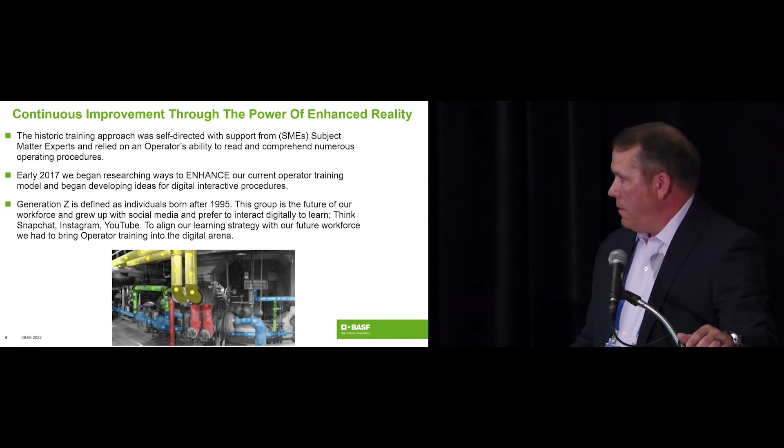Let's talk a little about some of the challenges. These aren't new challenges for the manufacturing community. These are always top priorities. EHS - what EHS enhancements do we see with bringing in digitalization? How can digitalization tie in with EHS? Equipment reliability - it's very important that our equipment runs. How do we train our employees so they're starting up equipment safely, shutting it down safely, so they're not damaging the equipment and they're not in harm's way?

Process safety compliance - this is big. How do we ensure with our training that operators have the competency? And if they don't have the competency, how are we doing training remediation? How do we remediate when they're not meeting the competency level that we need?

And that's not only on refresher training, but also on initial training. New hire onboarding - how can we lift our new hire onboarding with digitalization?

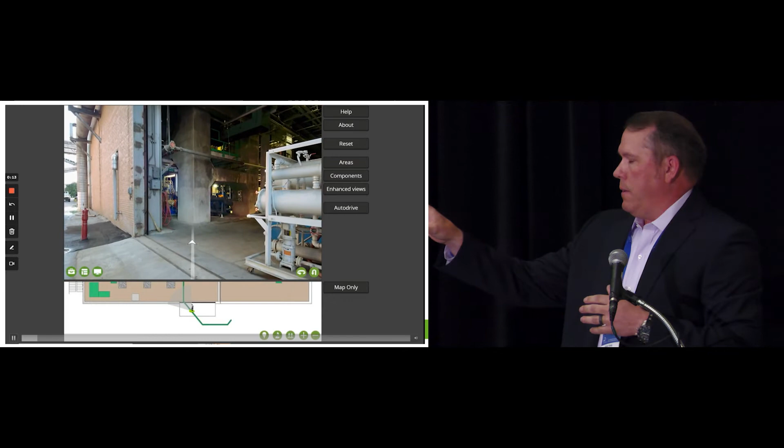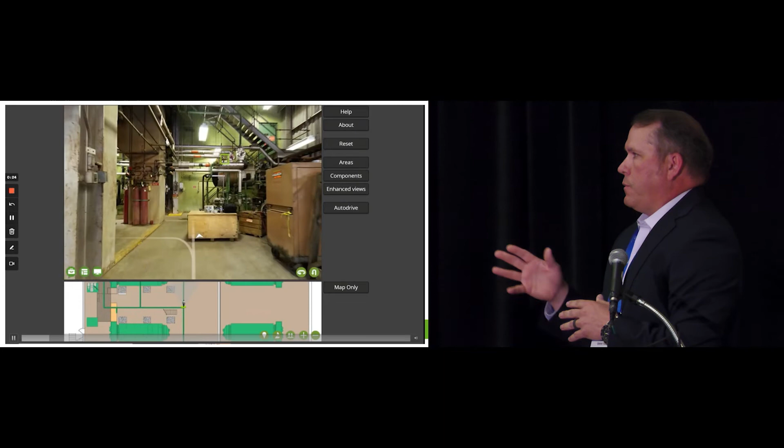So this is the digital replica. These are JPEG pictures that have been stitched together, allowing you to smoothly walk through your process. As you walk through, you can look at the different pieces of equipment—you can look up, look down, and do a 360 look around.

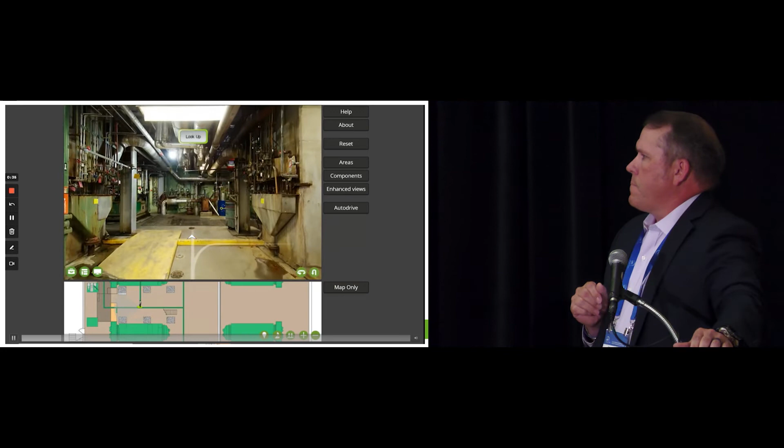Also, once we get into right here, you can see the green boxes. When you hover over a green box, it tells you exactly what it is. Then when you click on it, it gives you a blown-up view, and you can interact with the valve. This is where Vuvio is unique—you can actually interact with your equipment through the simulation.

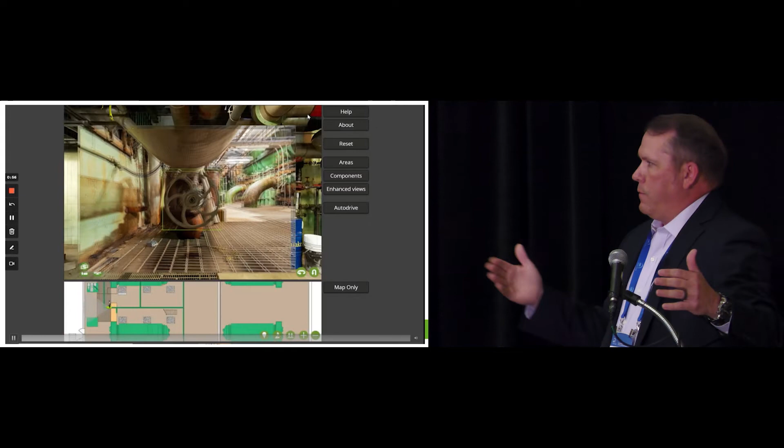A lot of the newer operators, this is what they're looking for. This is what they want.

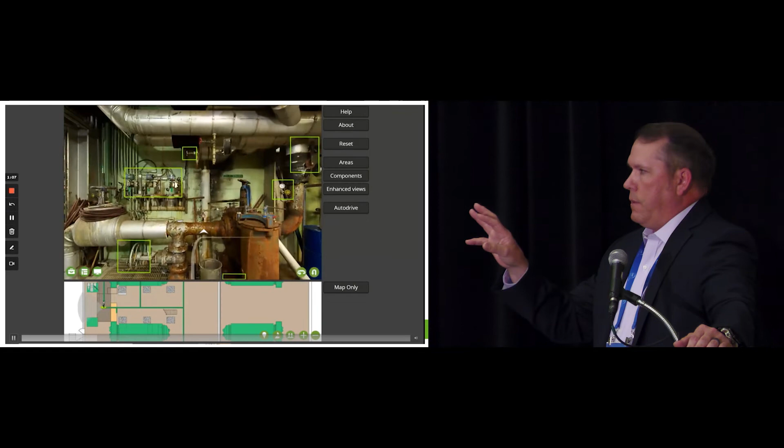We also catalog all of our components. So if you want to see a specific component, you can search for it. You can put a generalized verbiage up there, find it, click on it, and it takes you straight to that component.

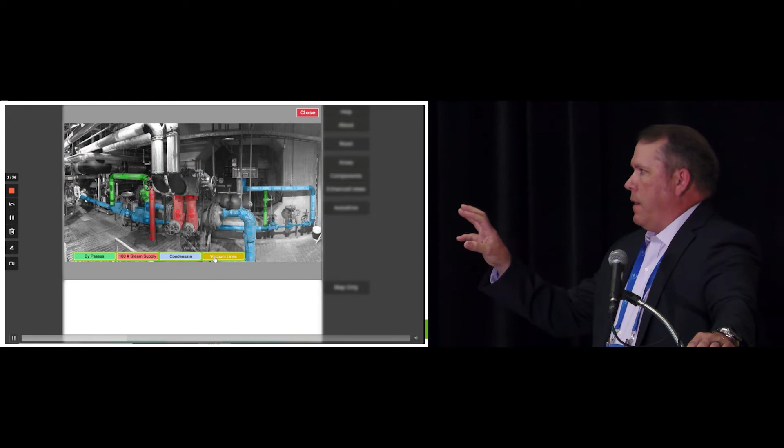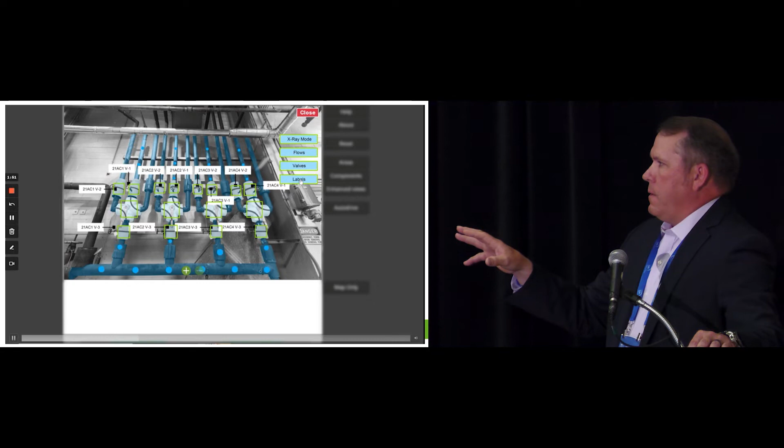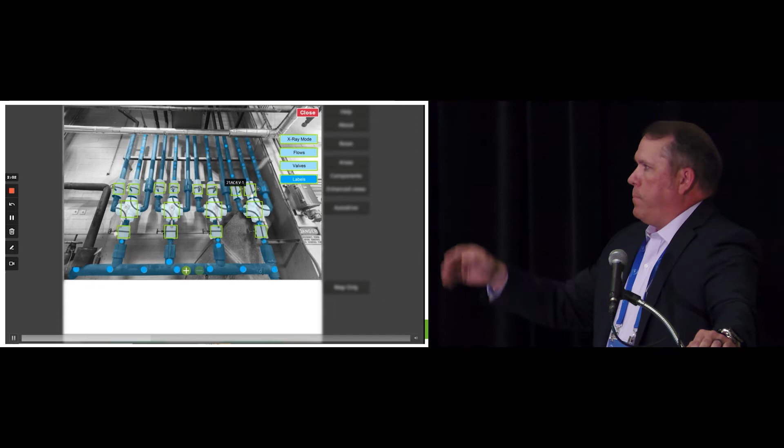Great piece there. So this is some of the enhanced views I was talking about. You can see the flows through the pipes and start the different flows. This is a more complicated manifold here, so you can see how the valves are activated. You can put labels on them, and then you can practice doing lineups. So if we're trying to get one product to one tank or whatever, we can play with these in the simulation.

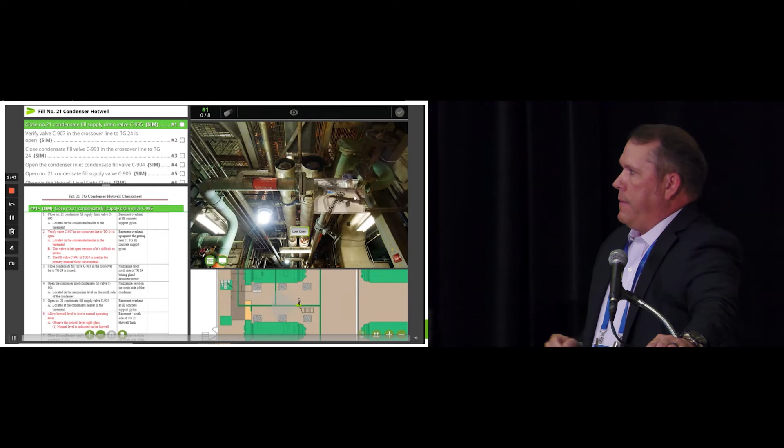This action checklist is what we're actually going to go through. In a procedure, you may have one step, but it may have 5 to 10 actions. So we pull those actions out of that procedure and put them in that action checklist. It may say we're going to close all bleeds on the pump, so we pull those out and say we're going to close bleed 1, bleed 2, bleed 3, and so on.

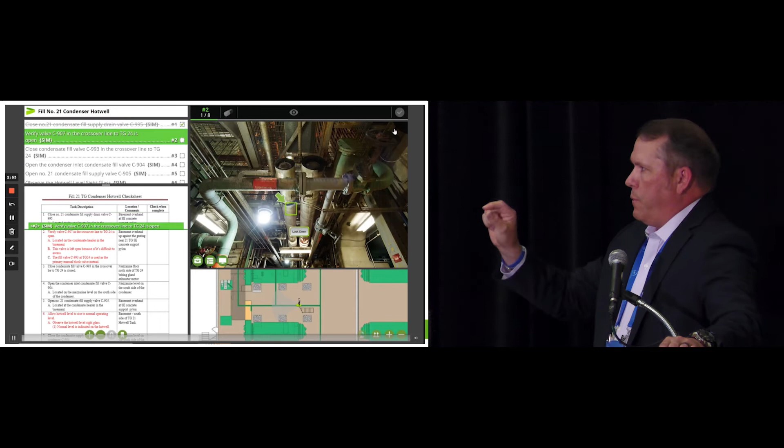You'll notice as you go through these, you're actually going through the procedure, performing the action, then you'll have a knowledge snippet—again, organizational knowledge transfer right here. If there's something important that needs to go in here, we've done videos, we've done text, a great option to pull some of that knowledge from operators who know something about this piece of equipment.

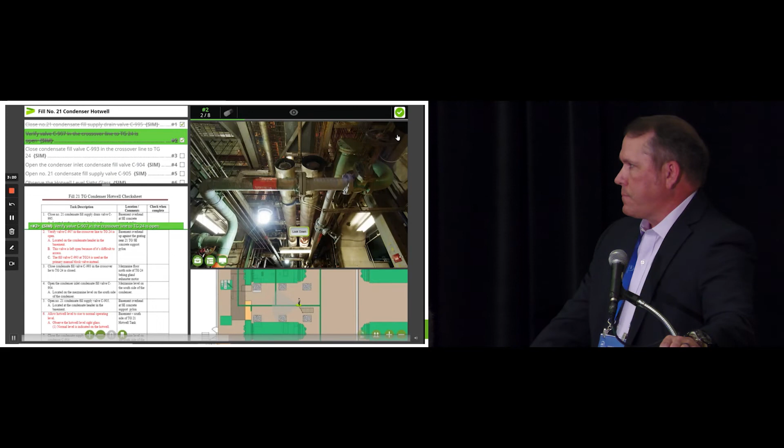And you'll notice, since this is the guided version, it's automatically going to walk that operator to the next component that we're going to have to operate. So again, teaching the operator where these components are.

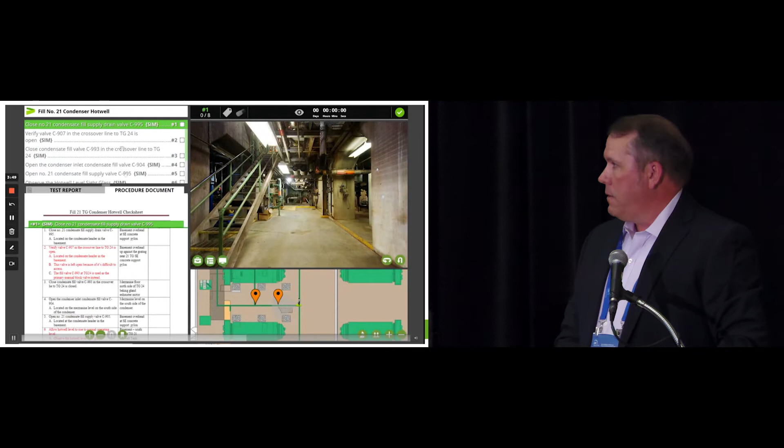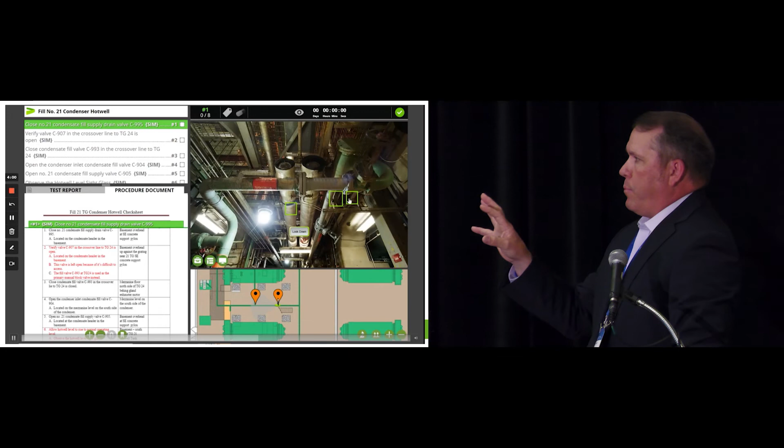This is the test simulator. Again, it looks similar, except that operator has to walk around, has to know where the components are, has to know what he's doing, and you can see you get instant feedback here.

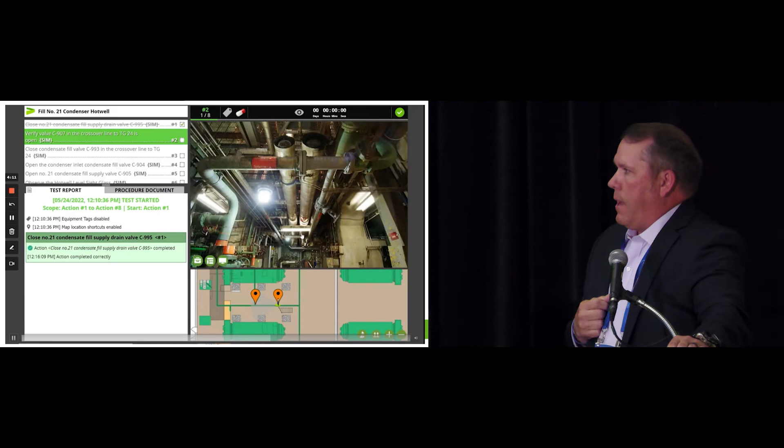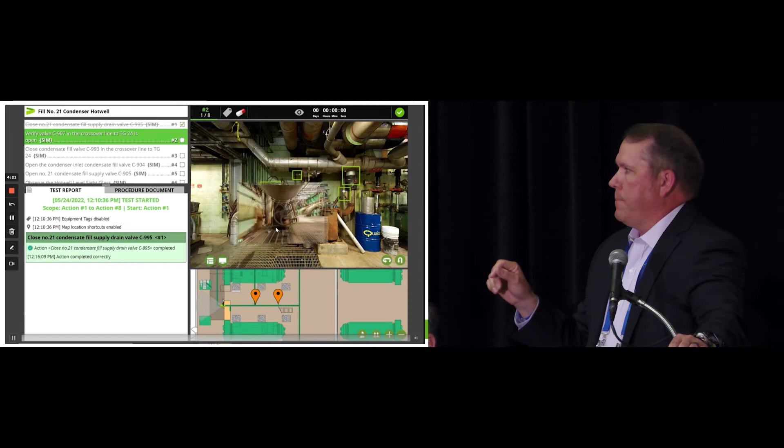So it said, okay, I closed the correct valve. All right, so he has to find the next step. And this one will show you if we complete it incorrectly—we'll close or open the wrong valve, and instantly he knows, okay, I made a mistake, I opened this valve, I should have opened this valve. You'll see at the bottom you can go back, review, or try again. The review will take you back to the guided version and let you review, and then continue.

So this is the test report—this is what it looks like. Again, this is a record. Each one of my operators has one of these, a record with this on all their testing.

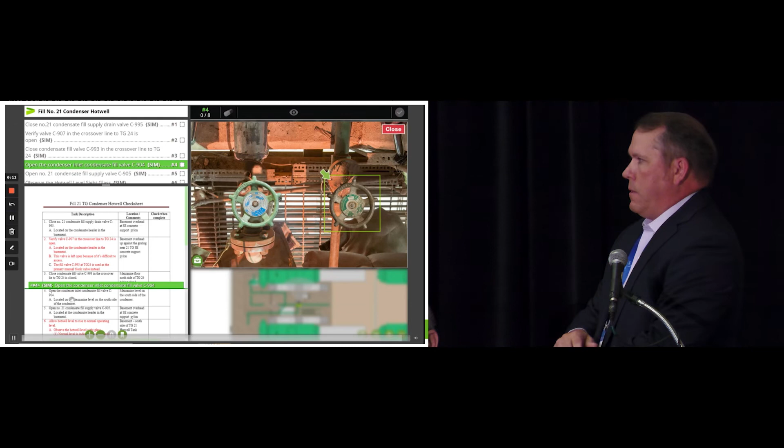So you can see there's 2 valves right side by side. They look identical, so they opened the wrong one in the test. So again, remediation. Now I can go back and sit down with those 3 operators and say, okay, let's look at step 4, you're having problems here, right? So again, a great tool, and again remediation. This is how we're making sure our operators are competent.

All right, and that was it. Okay, now let me finish up here. A couple slides left. So let's talk a little bit about...

Why enhanced reality simulators? Well, I pretty much explained why - time to proficiency, learn by doing, the instant feedback. And again, the influx of new hires coming in with the new generation, they need the digitalization piece.

And again, I want to say we're not getting away from the traditional. So we do the simulations, but we still have our traditional field test. I try to convey that when I give these talks, because people think, oh, you're doing simulations and taking the whole field piece away. No, we're not. This is a bolt-on to the field piece. We still do walkthroughs, we still do testing in the field. So this is just another piece to bolt on for that competency piece, to ensure our operators understand our process, our procedures.